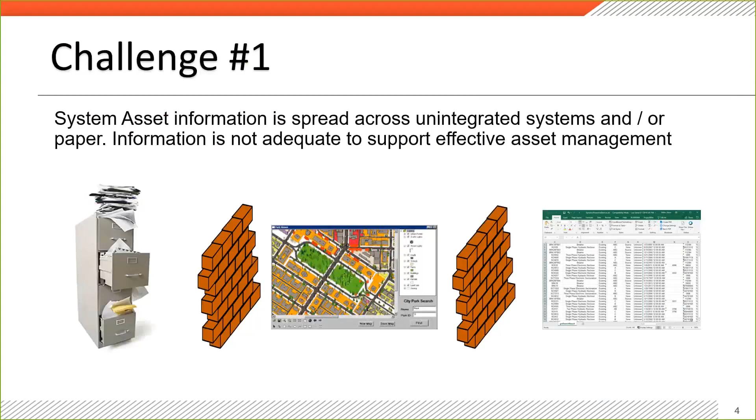Thanks, Steve. Customers who want to evolve their asset management processes face several challenges. Let's review some of the most typical and important challenges. First, effective asset management requires accurate, current, and actionable data. The most common problem we encounter when working with customers is data issues, and the first step is usually a data assessment. GIS is an important source of data, but other asset information may be tied up in disconnected systems or paper.

Challenge 2: it takes current, accurate information in the field to operate today's complicated networks. Paper maps or digital maps that aren't complete or have old information just isn't enough. You need accurate, up-to-date asset information that is usable and current. Any effective asset management program must be able to get information into the field.

The key to having actionable information is a solid plan to collect and maintain the data. Many customers we work with start out with workflows that have evolved over time. These workflows often cross disconnected systems where duplicate data entry and paper-based integrations are prone to degraded data. Understanding the information needed to effectively manage assets, and then designing workflows and system integrations that assure the data is not lost and is current, is critical. Systems designed to work together make this much easier.

Most utilities have GIS and inspection and survey programs in place. Problems arise when the information is not readily accessible to the people in the field who need to make everyday decisions. It is often not enough to know where the transformer or switch is located—you also need to know its condition.

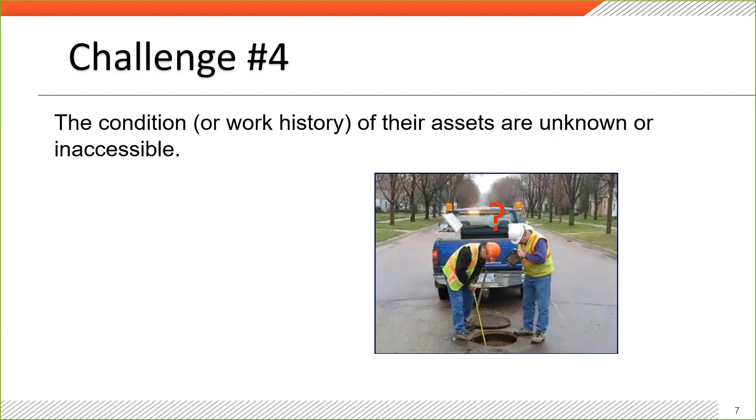For challenge number 5: without adequate asset information in an actionable form, it's impossible to understand where capital and maintenance dollars will have the greatest impact. Identifying poor performing assets, especially those whose failure would have a significant impact, allows the accurate targeting of spend. Without effective targeting of spend, budget dollars can evaporate without moving performance metrics in the right direction.

So for companies embarking on an asset management program, the journey is typically a progression. The first step is almost always an assessment of what information they have, where it's stored, and its quality. Next, an asset management approach and plan can be developed based on the current status of their information and systems. Work can then begin on a roadmap to get the information, systems, and approach in alignment with their goals.

As they move forward with an asset management plan, they can move from a reactive approach to a preventative or predictive approach to asset management. Company goals should guide the plan to assure important business metrics move in the correct direction and are proportional to spend.

So now Steve is going to introduce Power 360 AMS technology. Hey, thanks, Kevin. So what is the technology behind Power 360 AMS?

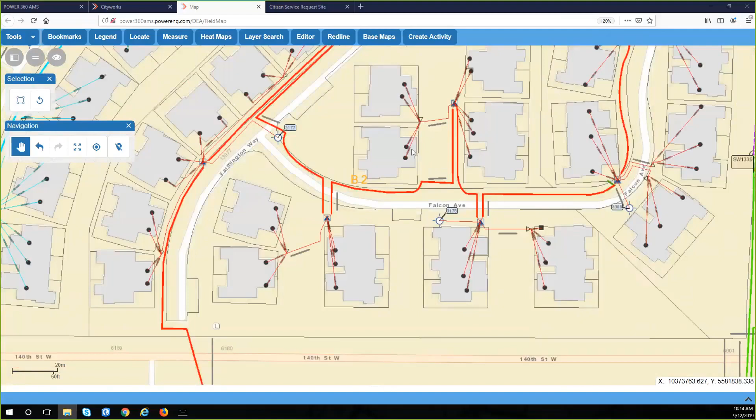If we have a look around this substation, we'll see in this data set, the substation is really modeled from the dynamic protective devices on out.

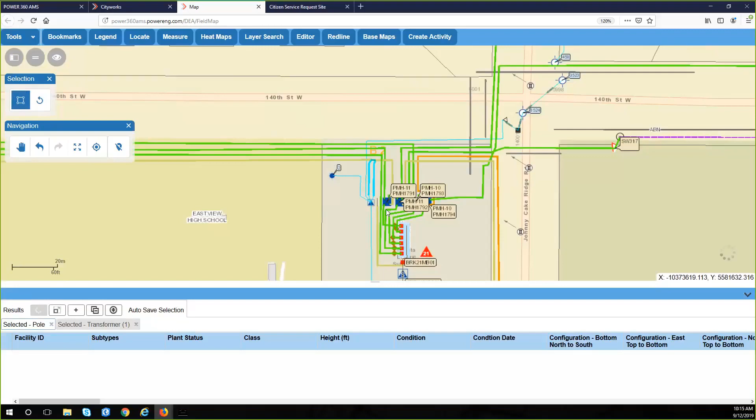In addition to viewing the data, the user can interact with it. Here I'll select a transformer, and we'll have a look at the information stored for that transformer in the geodatabase.

All the information available in the geodatabase is now available to the end user of the application.

Next, I'm going to talk about three-dimensional data. This is one area that we're seeing great interest, whether it's for vertical assets like generation or substations.

Esri's 3D technology has jumped leaps and bounds recently, providing fast, efficient access to data for end users. Currently, not many clients have 3D data, but that will become more commonplace over the next few years.

Here, we are viewing a 3D substation model that our development team created by taking 3D CAD data, converting it to 3D ArcGIS, pushing to ArcPro, and connecting ArcPro with Power 360 AMS.

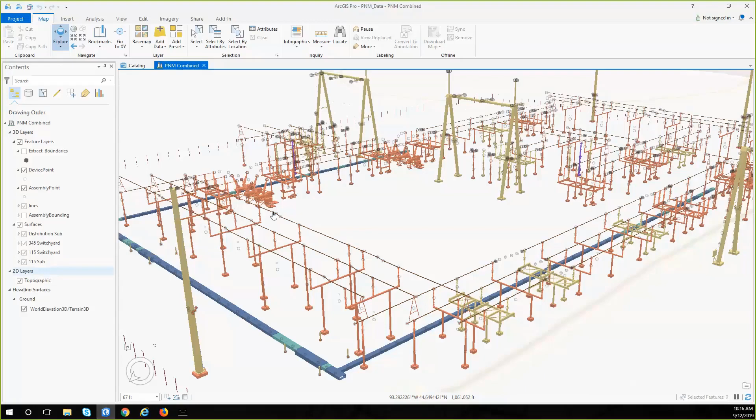Let's navigate around the data a little bit. We'll zoom in so the user can interact with the 3D model and go on and select assets, and then with a click of the button, be able to pop over into the work and asset management side of the application.

Yet another way that we can model your asset data is through the use of schematics.

Some of our customers are very used to dealing with and visualizing their assets schematically. For example, one of our generation customers uses piping and instrumentation diagrams when planning work on their assets.

So we took these diagrams and put them into the GIS, allowing users to interact with these features graphically.

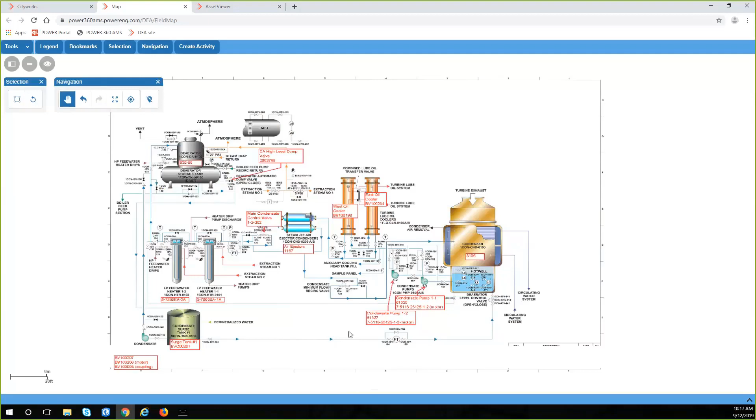Here, we're looking at the condensate system of one of our customers' generation plants. Zooming in, we can see the details of the system, the storage tanks, some of the towers, the feed water heaters and pumps.

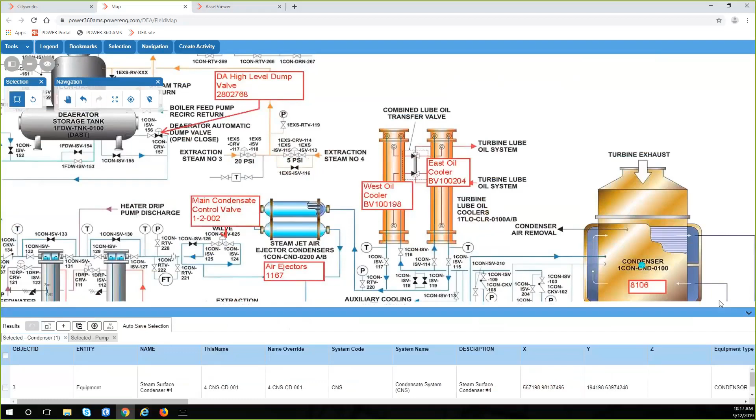The user can simply select one of these features and go and have a look at its attributes, as well as a look at the work history for this asset.

We'll see it's been involved in a number of annual preventive maintenance and a few corrective maintenance work orders.

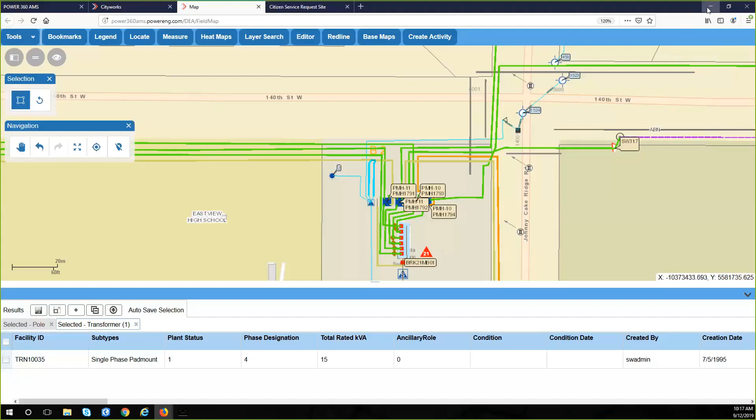So to sum up this asset repository section, I encourage you to think beyond the traditional role of GIS for asset management of distribution features, and consider it for management of plant and substation vertical assets as well.

Next, we'll move on to the next challenge. Challenge number 2 is about getting current and complete information that supports situational awareness in the field.

It is important that users have access to asset and work information, whether it's in the office or in the field, and on a device that suits their needs.

Power 360 AMS provides multiple user experiences for these different types of users.

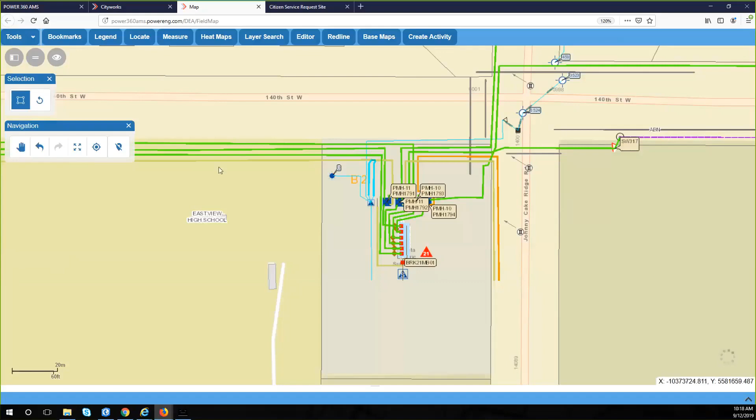Here, we're looking at the office application. As I showed you before, this has access to all the GIS data.

It provides a complete set of functionality to create service requests, work orders, inspections, projects, reports, and many other pieces of functionality.

The application has a tabular side that is integrated with the maps, but it also has the map application. I'll show you a few things on the map side. It has a standard set of GIS-based functionality. For instance, it has bookmarks.

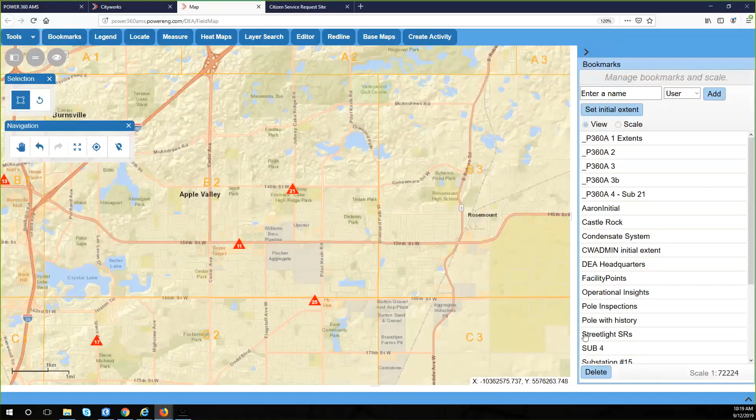These are configurable for the user. The user can save them, or we can have them set up to be shared by groups or by all users. Of course, we have a legend.

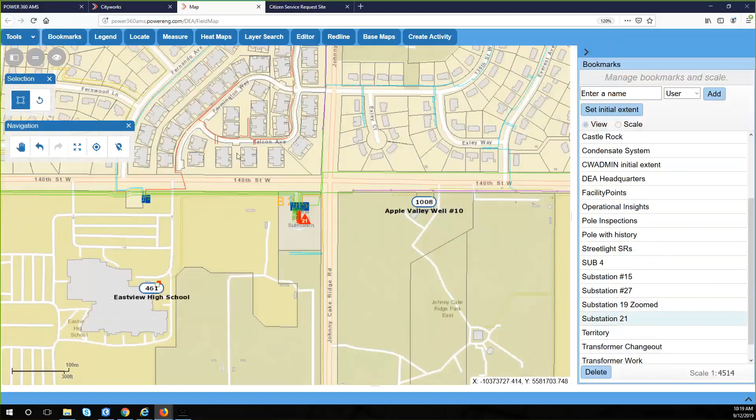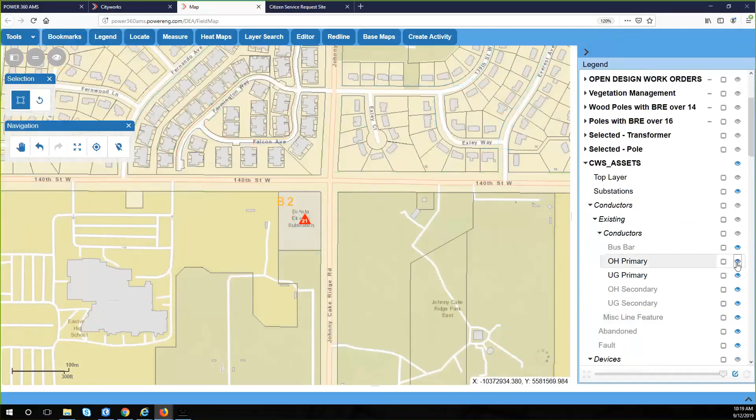The legend will show all the information available in the map, and the user can turn the information on and off and make them selectable or not.

We also have location ability, so we can enter addresses and geocode them, as well as measurement tools, heat maps for doing some spatial analysis, a robust layer search, the ability to edit data based off of permissions assigned for the users, redline tools, base map tools.

And finally the ability to create on the map service requests, inspections, work orders, and cases. If we have a closer look at the inbox, we'll see that we can tailor each person's user experience.

An inbox allows us to set up for each user or each group of users the information that they want to have at their fingertips to do their daily jobs.

Here I have an inbox set up that shows my daily work. Everything, all my open service requests in a tabular format as well as on a map. My open work orders, again tabular and on a map, and my active inspections, tabular and on a map.

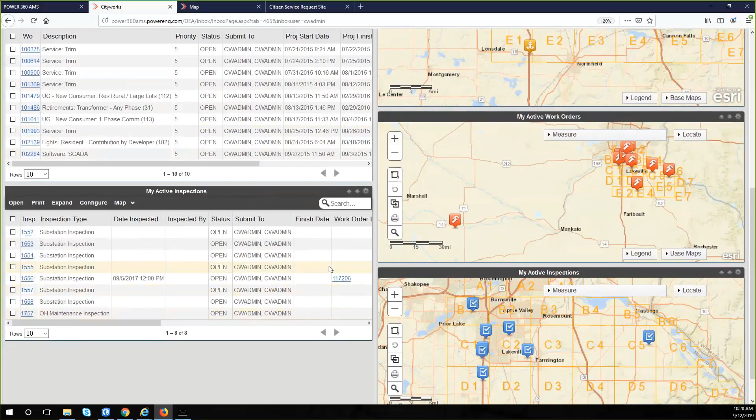We can also set up tabs to be shared by users performing common functions. So in this case, everyone involved in streetlight maintenance will have access to this inbox, where they can see open streetlights, again on the map or on the list, and they can keep track via charts of the progress of their work.

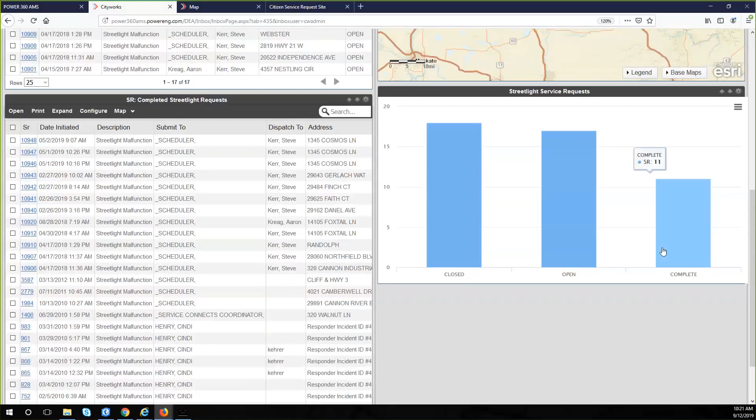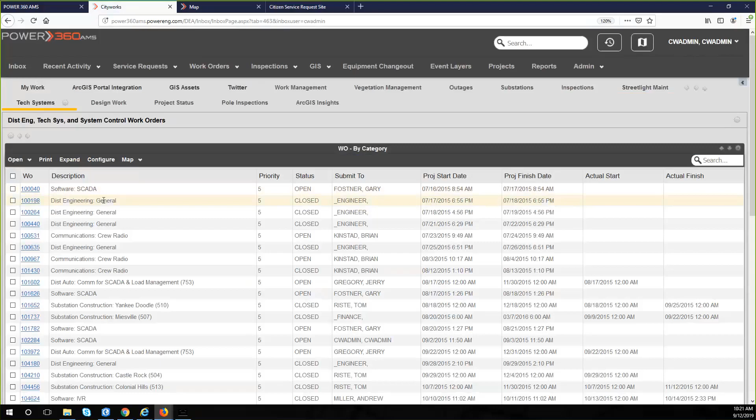Another example is tech systems. The group responsible for maintaining SCADA and other communication networks could have their own inbox, and again available data can be in tabular or chart format.

Respond is a connected web-based application and has access to the same data as we saw in the Office application, but it just has a different user interface geared towards field personnel. However, because of its slick user interface, we find that many of our Office users prefer this application.

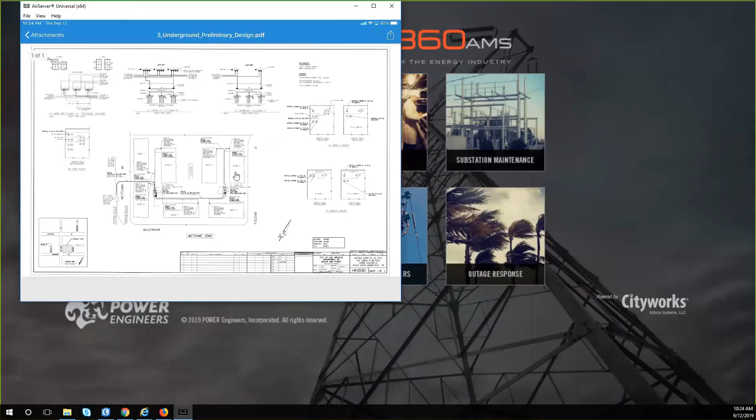And then they can record comments about the work that they performed, as well as enter labor, material, and equipment used to perform the work.

The inbox on the application is similar to the Office app in that it can be customized per user. And we'll see that if you look along the bottom, we have a tab for the work orders on this user's plate, the set of service requests, inspections, as well as permitting cases.

One last thing I'll show you is that this application can be synced up with other Esri apps. So going to the Share button at the top, we'll see we could immediately jump to the Respond or the Server apps, or we could jump to Collector or Navigator if you have those applications on your tablet.

As you can see, the Power 360 AMS platform provides applications for both office and field workers, allowing them to access the data they need in order to perform their day-to-day responsibilities.

Let's look at challenge number 3: how systems can be deployed and integrated so that they support efficient workflows that assure the capture and maintenance of work and asset information.

To show how Power 360 AMS can help an organization achieve efficient work processes, I'll show a couple of integrated workflow examples. The first workflow deals with customer and citizen requests. Let's have a look.

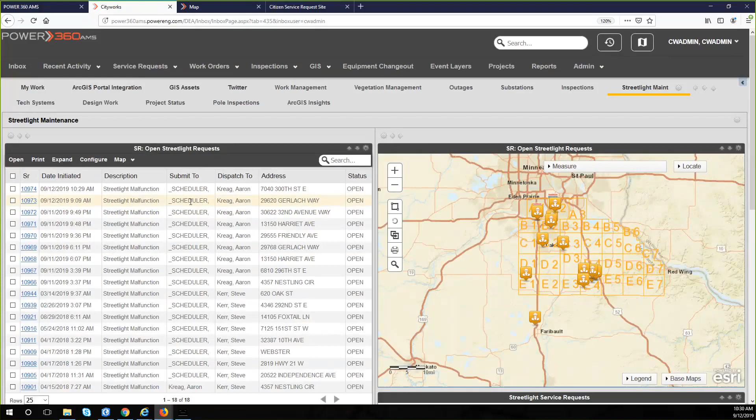The next example of an integrated workflow I'd like to talk about is design work. For all your capital projects, they'll go through a process, quite an elaborate one, from design through to construction and all the way through to financial closeout.

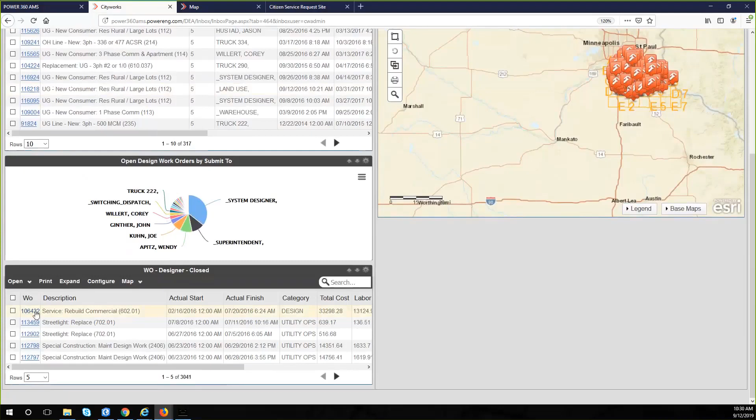Now, CityWorks is not a design application, but we have integrated it with a number of graphical design applications. In the example I'm going to show you, this is the result of integration with Schneider Electric's ArcFM Designer. So the design is performed in ArcFM, but the whole process from the request through to design, through to construction, through to financial closeout is all tracked within Power 360.

I'll show a few points here. The task indicates the workflow that this work order needs to follow. Anything with an asterisk indicates that there's integration involved.

We'll also see that the list of assets that were created as a result of this work order are recorded within the work order screen. And we also get a list of costs—so we can track the labor costs required to do the work, the material costs, equipment costs if there are any, permits, and a total work order cost.

The last thing I'm going to show you on this is the materials. The system can track both estimated and actual materials. Here's a list of estimated materials—this is a set of materials that were included in the design and passed over into the work order via the integration.

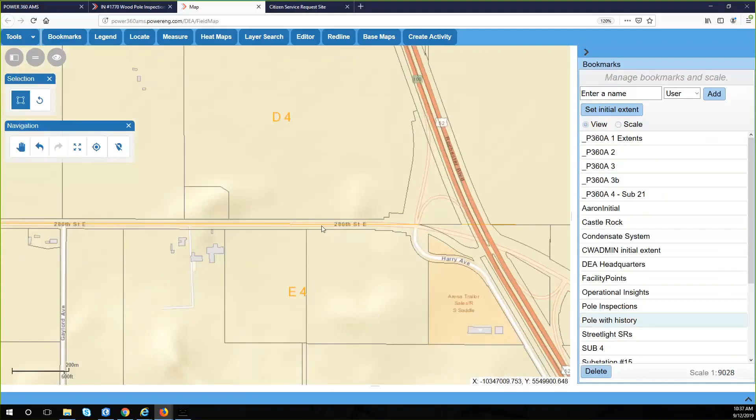I'm going to select that feature and go over to a function that we call asset analytics. This is a nice form that allows us to select features on the map and then have a look at the history of work done on those assets.

We'll see we have a number of work orders here—some general maintenance as well as a replacement. We have a list of the inspections that were performed, cost history showing how much this asset is costing us over time, and the attributes of this asset.

And finally, the condition—here we get a time-based sequence of the condition of that asset. In our system, a low condition score is good. We'll see the condition of this pole gradually deteriorated until it was replaced in 2012, and then it had a very good condition. We'll see in the next challenge how this cost and condition data can be used to analyze assets to make informed decisions on maintenance and replacement.

So our final challenge is: how can we pinpoint which assets have the greatest impact on reliability and safety of our network? The final thing I'm going to show today is operational insights.

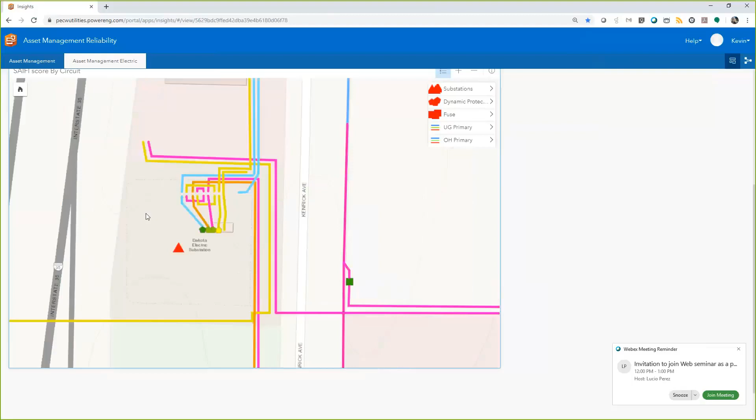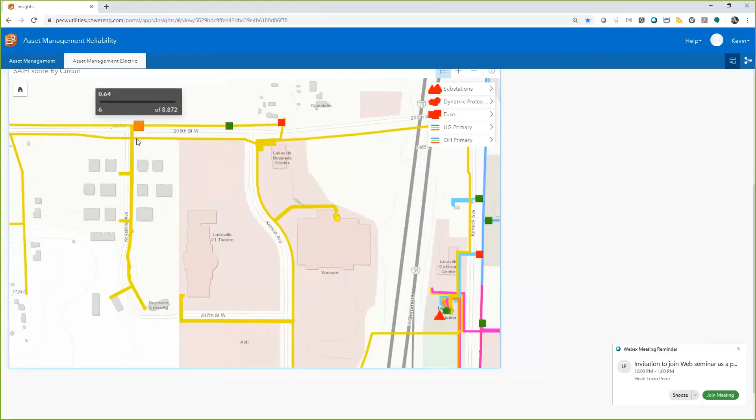So the capability I have here, looking at the yellow circuit out of the substation, is to zoom out and look at the protective devices in that circuit to identify devices with low SAIFI scores. By doing that, I can zoom in and know how to focus my attention on areas of the circuit that are actually poor performing. So instead of needing to inspect the entire circuit because of a low SAIFI score, I can send my field inspectors right to the problematic areas, and they can walk down that circuitry and identify and correct those problems. That's what I wanted to show.

And now I'm going to turn it over to Chris, and she's going to introduce our next presenter.

Thanks, Kevin. At the beginning of the session, I introduced our guest, Jana Weir, who is the Systems Program Supervisor at Independence Power and Light. Power has worked with IPL over the past couple of years to implement the underlying Power 360 AMS technologies for the Service Center, Generation, and Substations departments. Jana will give us a brief background on IPL, a summary of the ways they are using the technologies, and wrap up with the business benefits IPL is seeing from their use of the platform.

Thank you, Chris. Independence Power and Light is a municipal electric utility that's been providing power to our community for over 115 years. As a municipal electric utility, we not only provide power to consumers, but also maintain a full transmission and distribution network owned and maintained by the utility. We have a combined cycle power generation facility currently utilizing natural gas.

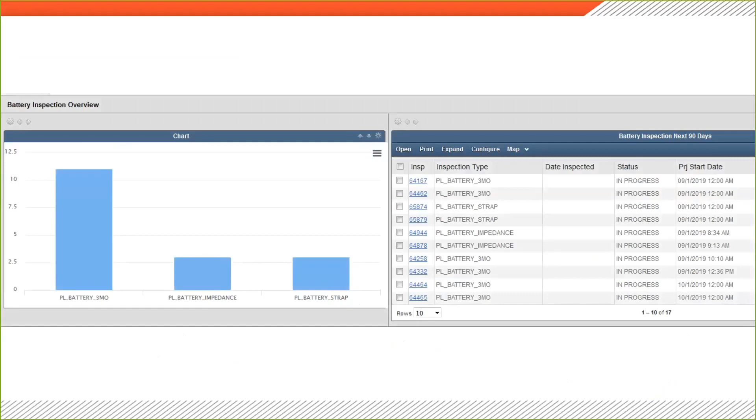This set of screenshots show how we are tracking battery inspections, as well as the results of the importation of battery test results into the system, including flagging for warnings and failures.

With the development team of Power Engineers, we have been able to seamlessly accomplish multiple critical integrations. While we wait for the implementation of our new Munis financial and payroll system to be complete, we required the need to manage inventory levels and time entry in our existing material management and JD Edwards system. Power Engineers was able to provide us with a robust integration for these processes that yields the flexibility to be adjusted as the new systems come online, which is imperative for our daily operations.

We're currently in development with several additional integrations that will aid in further building efficiency within our utility. We discussed the substation battery testing capabilities previously, and we've now started working to bring the rest of their asset management, such as relays and transformers, into CityWorks.

In addition, we're in development for integrations with two of our city's primary applications, utility billing and Munis. The utility billing integration will allow both the electric and water utilities to keep utility field service activities in Power 360 for tasks such as meter rereads and turn-on, turn-off functions. With the Munis integration, we'll be able to manage all of our materials and storeroom for the collection of job costs while also satisfying the finance department's need for bill payment and centralized purchasing tracking in their systems.